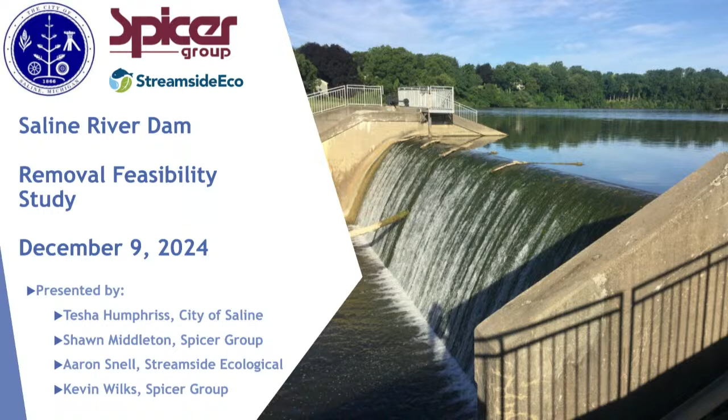At 6 o'clock. Okay, is this on? Is it on? Okay, friends, good. Janet, can I trouble you to shut those doors? Thank you. Should be unlocked.

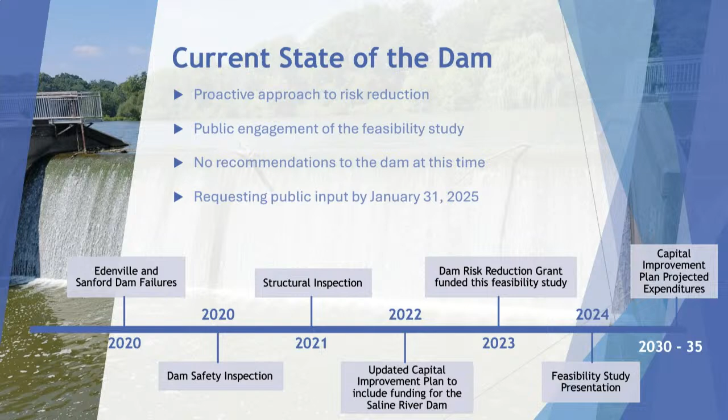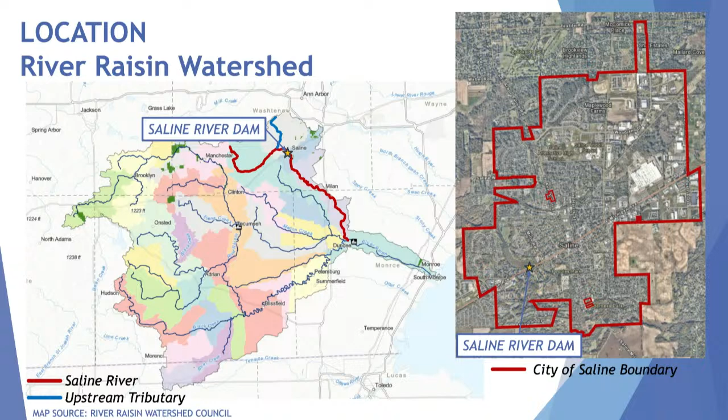I'm going to start out with just a little basic facts on the dam. We are in the River Raisin watershed, in the upstream portion of the River Raisin watershed. This slide shows the current location of the dam in the River Raisin watershed.

The dam was originally built in the 1800s. In the 1930s, Henry Ford rebuilt the dam. It had an earth embankment failure in the late 1960s, so the dam in its current state was rebuilt in 1973 with the radial gates.

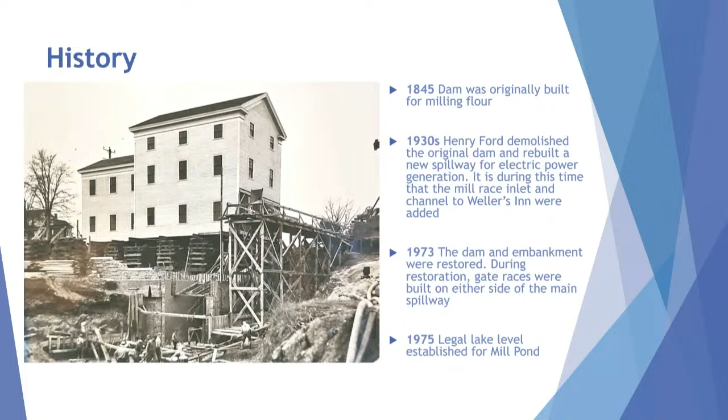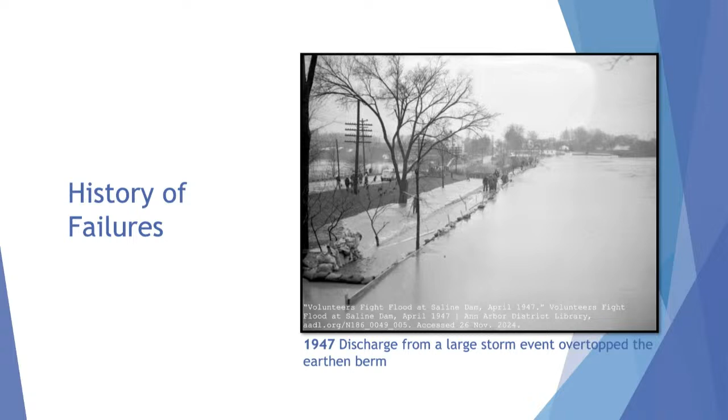So now I'm going to turn it over to Shawn Middleton. Go ahead.

Okay, hold it really close. Okay, how does this sound? Are you hearing me okay? Okay, I'll try and make a point of staying close to it.

My name is Shawn Middleton with Spicer Group. I'm a civil engineer with a background in water resources. I've been working on dams for about 30 years off and on at different levels, both rehabilitation, reconstruction, and removal. So I've been on both sides of this fence and in similar meetings to this in the past. I'm going to hit on a variety of things that will set us up for the rest of the presenters to talk about our feasibility study.

So Tesha just mentioned some dam failures on the Saline Dam. There's been dam failures in Michigan. Currently, on the dam safety website, as a matter of fact, we have some representatives from EGLE here, and there's 41 dams known to have failed. I'm sure it's more than that, but that's probably what's documented. In 1986, there were 14 dams that failed in the center and west side of the state.

The relevance of those is that shortly after that is when the Dam Safety Act became law. That's important because anything we do with the dam has to meet regulatory requirements. So when this large event happened, all 14 of these dams failed, and it was followed up by legislation that resulted in the Dam Safety Act.

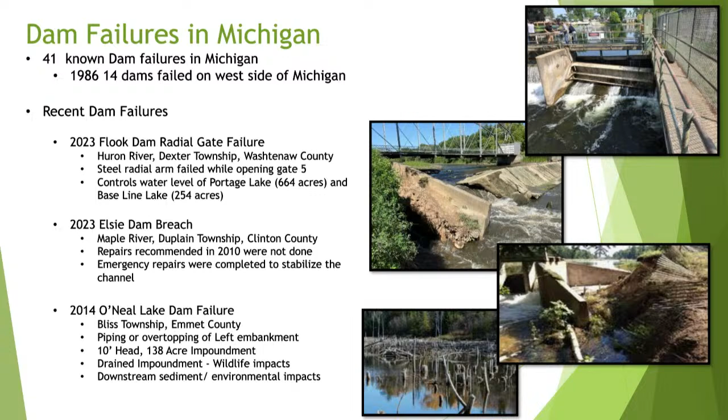On a much bigger scale, everybody's well aware of the dams that failed up in Midland and Gladwin counties with the Four Lakes Dam failure. We're not talking about these because they're similar to your dam - the reason we have these in the slides is really what came about after these dams failed. The state was very proactive in looking at what to do to improve safety and reduce risk, so they created a dam safety task force and produced a report in 2021. There's a lot in that report, and I won't go through all the details, but a couple key things.

Some of the recommendations were based on FEMA's template, or what they do on dams across the country, and a key component of that is the design flood. It's a bit technical, but it's important because it drives a lot of things we'll talk about tonight. Right now, the dam is required by state law to pass the 200-year event. It's considered a significant hazard dam - I'll talk more about that in a second - so it has to pass this event.

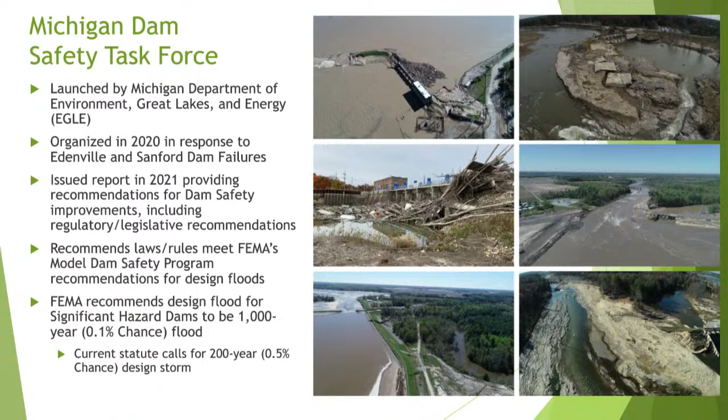Another way of looking at the 200-year event is to call it a 0.5% chance of occurring in any given year. That's probably a better way of looking at it, because you'd have a 200-year event every couple years, but statistically it's 0.5% in any given year. That's right now what the design is. If you go to the FEMA rules, for significant dams it potentially could have to pass what they call a 1,000-year event - that's like 0.1% per year. So it becomes a much higher standard - the bar gets raised, and you'll see later why that's important.

So dam safety in Michigan - as I mentioned, we had regulation established in the late 1980s as a result of those dam failures in '86, and there were some in '85 as well. In 1994, the state of Michigan had all kinds of environmental laws, and they got compiled together into one act called NREPA. That's why the Dam Safety Act is called Part 315 - it's part of that compilation of laws. If you hear the term Part 315, it's talking about the Dam Safety Act.

That basically has a lot of different requirements and rules around it, but some big drivers are dam inspections are required for all regulated dams in the state. Any deficiencies identified need to be addressed. A big thing out of that is owners of dams are liable. The owner of the dam is liable for damage, whether it's economic, environmental, loss of life, the owner's liable for that. So there's a heavy risk put on the owner of a dam.

As I mentioned, it's administered by EGLE. So they oversee, make sure dam inspections are done. They review the inspections. They follow through to make sure the work is done, identified deficiencies are being taken care of.

There's about 2,500 dams in the state, and that's probably a big plus or minus, who knows? There's all kinds of hidden dams in woods and farm fields and everything, but there's 813 that are regulated. In the state of Michigan, a regulated dam is basically taller than 6 feet during a design flood, and it impounds more than 5 acres. If that's the case, then it's regulated. The Saline Dam's a regulated dam.

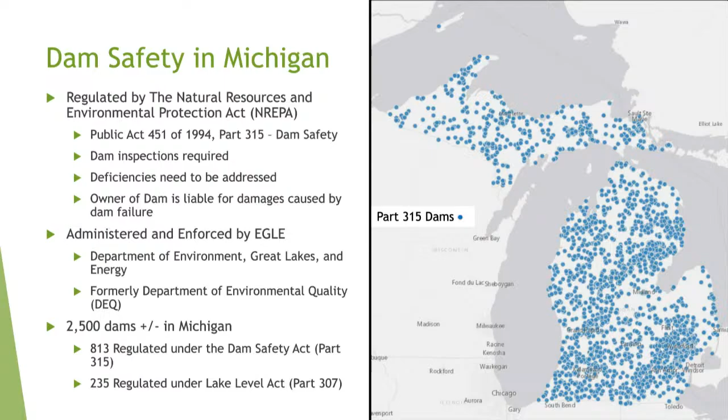There's also 235 Lake Level Act dams, and those are court-ordered levels on a lake. Saline Dam has a court-ordered level, and between those two, those are the ones that require inspections. Under the Dam Safety Act, they're between 3 and 5 years. Inspections are required based on the hazard rating, and then a lake level is every 3 years. And that's what we're under. So you get an inspection on the Saline every 3 years.

I'm going to hit on two things that sometimes get confused together. I'm going to talk about hazard potential classification, and I'm going to talk about the condition assessment of a dam. So hazard potential classification has everything to do with what's downstream and if the dam fails.

So if the dam were to wash out and breach, what that does downstream is how you classify the hazard of a structure. A low hazard dam has basically loss of life is not expected, and really even environmental, economic, or lifeline - which lifeline would be a road that gets washed out that EMS vehicles may need to use - is not expected. A significant hazard dam, still no loss of life is expected, but you start anticipating impacts to whether they're economic, environmental, or lifeline components downstream. And that's what Saline Dam is, and I'll talk a little bit about some of those factors.

Then a high hazard dam, its loss of life is probable. And so when you look at a dam and you simulate it failing, and if there's homes down in the floodplain with very short warnings, you can be in a high hazard dam situation. And we're not here, we're in a significant.

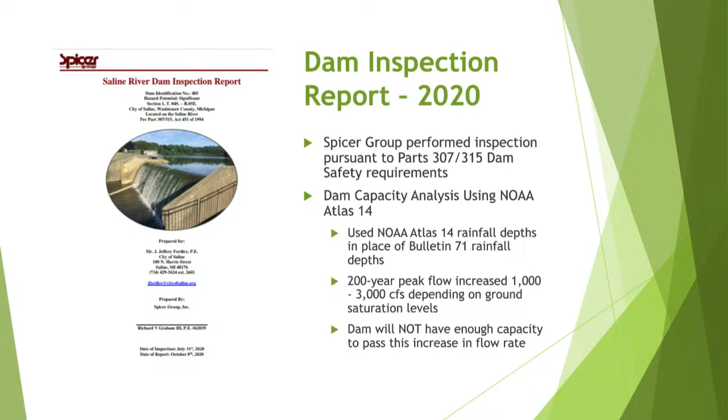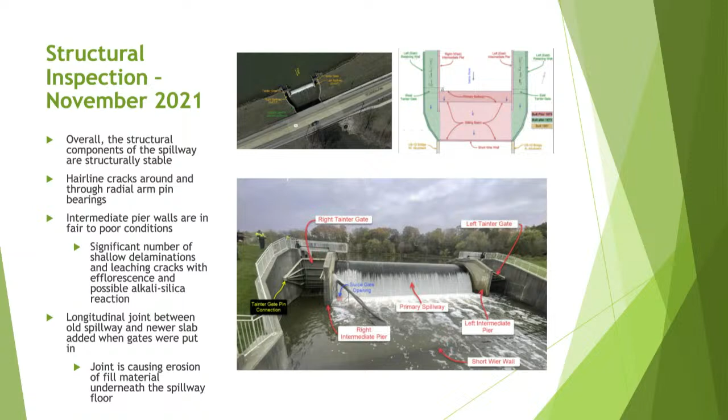We did a structural inspection in 2021, basically shut off flow to the impoundment, allowed us to get in there and walk around. A lot of this is just visual inspections. We're taking a lot of photos up close, looking at cracks, different conditions in the dam. We do what we call sounding, which is basically banging on concrete with a hammer, more or less. When you hit sound concrete, it makes kind of a pinging noise, it's really clear. When you hit delaminated concrete, it's a very hollow noise. You can look at a face of a wall, and it can look fine, but when you sound it, you find out that it's not structurally sound. It can have issues with it.

2023, every 3 years we did another inspection, still had a fair rating. We looked at some recommendations, reconstructing or repairing the intermediate pier walls, I'll show you some pictures of that. Continue to remove brush, it really isn't too much. Continue to monitor depressions in the right embankment, there's been some notes about a little low spot, so we're going to monitor that and watch that. Repair erosion, develop operational procedures for cold weather gate operation, and inspect some scour and undercutting downstream of the stilling basin.

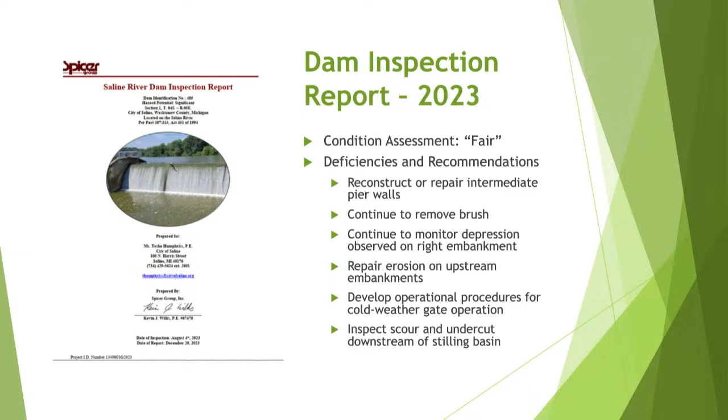So just some quick photos of existing conditions. This is pretty typical of different spots in the dam, but this is what we call spalling - that's concrete spalling off. There's also hairline cracks happening here.

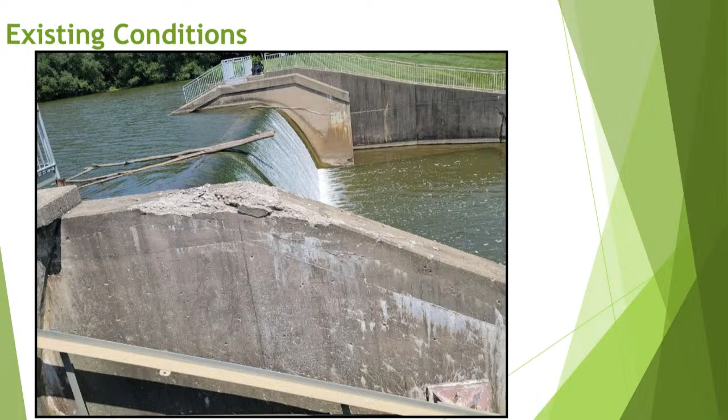We've noticed little differences from 2020 to 2023, not big things that jump out, but there are small changes happening, getting worse.

This area, if you can see the red hatching, that's where we sounded the wall with our hammers, and we had that hollow sound that came back. That area probably has some delamination behind that wall. Even though the wall looks okay, the concrete's starting to get a little punky and needs to be watched.

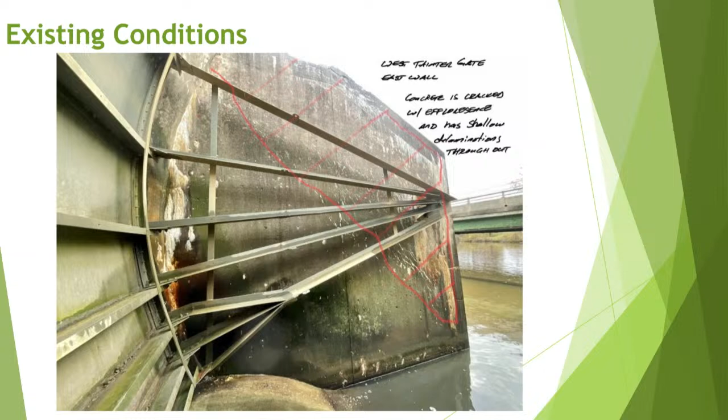This is also a critical component of the dam, because that gate's taking a load of the water. It's transferred to those arms, and those arms are transferred to a pin that all goes into the concrete. So there's a lot of force being applied right there.

Looking at the other side, there's some hairline cracks again, and there's what we refer to as efflorescence - that's the chalky white stuff you're seeing there. That's a result of chlorides being leached out of concrete. Likely here, water's falling on the concrete, leaching into it, and then back out, pulling out those chlorides, and then they dry up on the outside.

Just a close-up picture of one of the pin areas for the Tainter gate. Looks like they might have patched this a few years ago - you can see it in the upper left-hand corner, and there's also some hairline cracks on top of that.

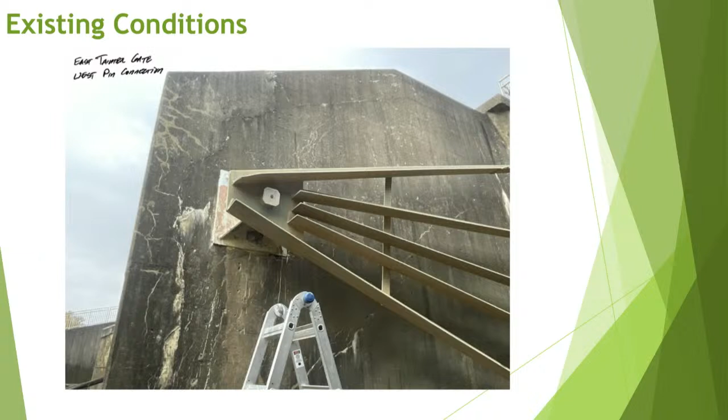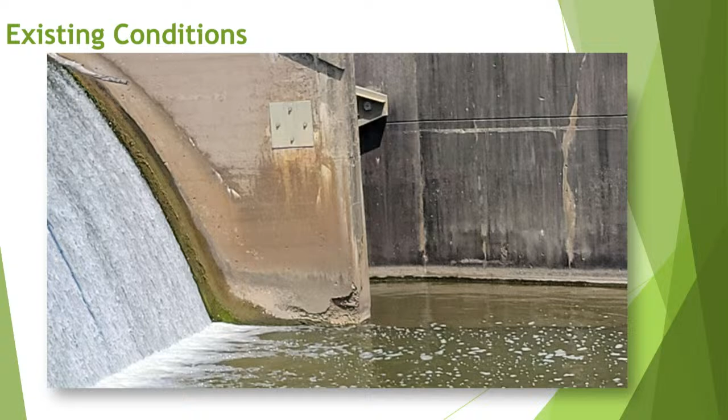I think this is my last photo. One thing to point out here, it's spalling concrete at the water line, but this one actually has rebar exposed. The problem with rebar getting exposed is it immediately starts to rust, and when rebar rusts, it expands, which then pops off more concrete, which gets rusted, and it chases itself out. So these are areas you want to get to relatively fast.

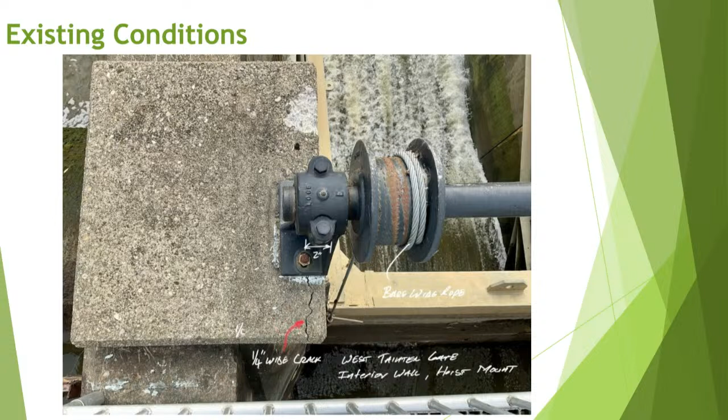This is the support for the Tainter gate lift. We noticed a crack there - obviously a very critical component of the dam, so it's something we want to keep an eye out and look at making some improvements to.

So I'll finish up with this slide before I turn it over to Aaron. The good news is there were only 2 out of 50 applicants that received funding for a feasibility study, and Saline did a nice job of getting this grant. It's funded by EGLE, and as mentioned earlier, it's called the Dam Risk Reduction Grant Program. The key word is risk reduction - EGLE's looking at it as, if you want to reduce risk, you eliminate the risk. If you don't have a dam, you don't have risk. So that's the first thing on the list for funding of construction or studies.

It doesn't mean that's what we're doing, it just means that's their priority. They also fund improvements - more spillway capacity, improving a dam embankment - and that's reducing risk too, but just not quite as much as taking a dam out. So the goals were to look at the feasibility of removing the dam. That's one of the fundamental things we're looking at here - is it possible to do it, and what are the costs?

We've done a lot with that, and I won't get into all the details - some of that may come up when Kevin's talking. We look at permitting requirements, and even though it's a dam removal feasibility study, we have evaluated rehab and reconstruction components too, with costs. The scope is outlined here - we're doing a lot of survey work with the river, environmental assessments, sediment assessments, hydraulics, HEC-RAS modeling, and looked at alternatives and cost estimates.

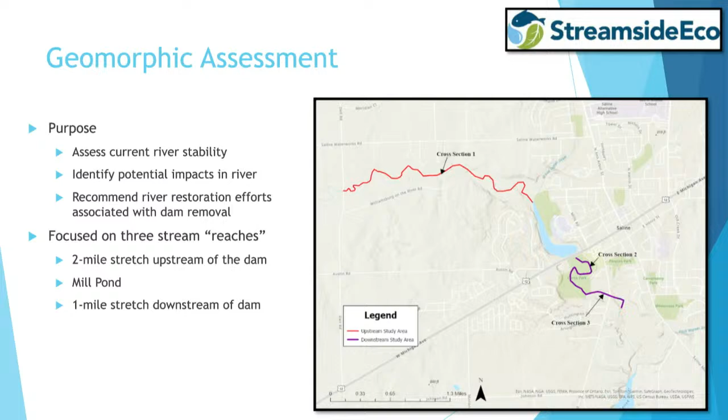This is probably a presentation in itself if you want all the details. But the guidance I tried to provide is: is the existing river stable? And if the dam were to be removed, what might the river look like through the former impoundment?

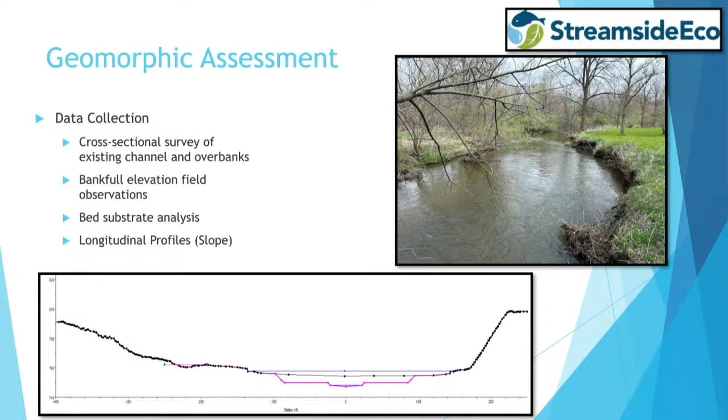The next thing I did was a mussel survey. Freshwater mussels - there's about 42 different species in Michigan. This falls under the permitting category that Sean had mentioned. Mussels have become a really big deal in Michigan over the past 10 years or so. They're a pretty good indicator of environmental health. There's several species that are threatened or endangered for a variety of reasons.

I went out and looked at 5 different sites: one upstream of the dam on the Saline River itself, one on the small tributary that comes into the impoundment from the northeast, one right below the dam, one within the impoundment, and another one down at Monroe Avenue.

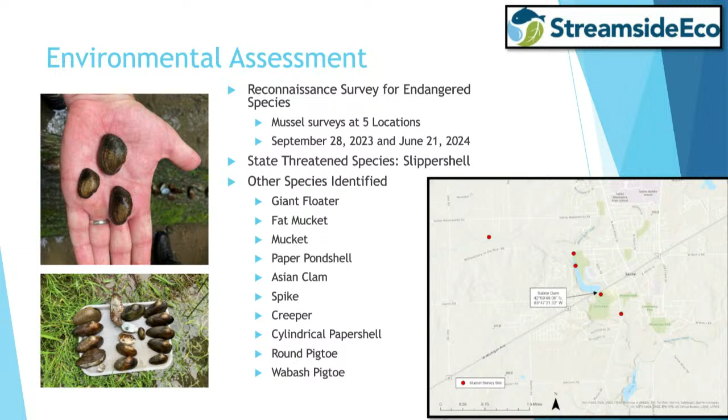You'll notice I only have a few slides. You might be asking why I'm not talking about fish or macroinvertebrates or anything else. This is maybe a bottleneck - maybe that's not the right word - but this is something that permitting is really focused on. If the project moved forward, we'd have to talk about fish and other kinds of critters. But this is just a baseline for the feasibility study, trying to pick out things that could be fairly significant that we'll have to deal with.

I've worked on lots of dam removal projects throughout the state. I think these are a few benefits of dam removal that I thought I'd mention. These are true benefits that you see in just about every dam removal project.

Restored free passage for fish and other aquatic animals. In its current state, if you're a fish that needs to get up the river to spawn and you hit a dam, that's the end of the road in most cases. You can't make it any further up into the headwaters. Interestingly, a lot of the mussels you find depend on a fish host in their life history. These mussels will attach their egg to a fish, and the fish will swim upstream as far as it can go, and then the egg falls off and develops into a mussel. So a lot of these critters that live in the stream have interrelated life histories. If the fish can't make it any further, neither can the mussel.

Removal of a dam typically improves water quality. The Saline River at one time would have been free-flowing before the dam was put in place. Now that the dam is there, the impoundment basically serves as a sink for pollutants. Any water coming off the farmland or forest land in the upper watershed mostly settles out in the impoundment. That's why you see the impoundment start to fill in over time. It's the sediment, and the sediment carries nutrients and other pollutants which attach themselves to it and settle out.

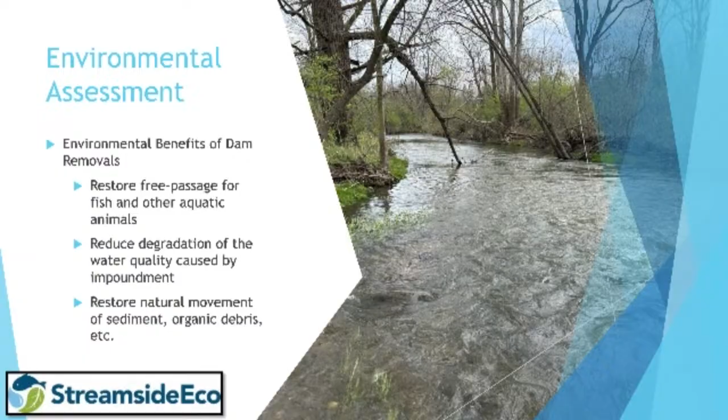As Aaron mentioned, the first slide I'm going to talk about is the impoundment and sedimentation. As part of the feasibility study, we did a survey of the impoundment, surveying both the top of sediment and the sediment depths. This allowed us to estimate the quantity of sediment that has filled into the impoundment over time. We found that approximately 30% of the impoundment is actually filled with sediment that has accumulated, which would have otherwise gone downstream. To put that into perspective, that's about 23 Olympic swimming pools worth of sediment.

Okay. Can you hear me now? Okay.

EGLE has some guidance about sediment sampling, testing, and analysis for dredging projects. If the Saline River Dam were to be removed, we would have to do something with all of the sediment that would come with it.

If the Saline River Dam is removed, we have to manage the sediment in some way. Part of what guides how we manage it is whether or not the sediment is contaminated with any toxins or heavy metals. So we followed the EGLE guidance to sample and test the sediment, submitted it to a testing facility, and they tested for everything EGLE requires. What we found is that it was below the allowable limits for all of the things tested. I won't go through every one of them, but basically the tests came out good.

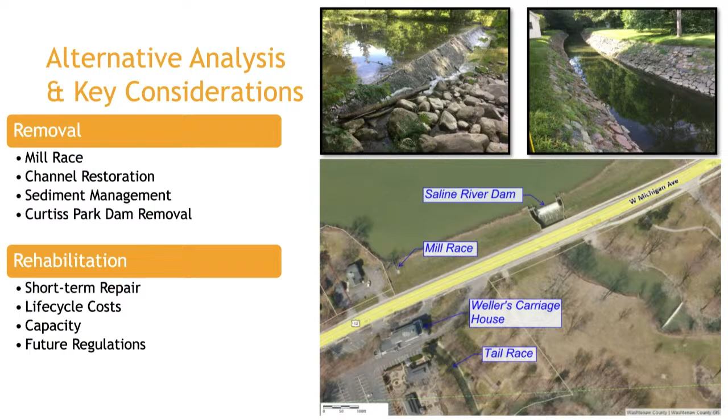So I'm going to show some artist renderings of what the Saline River Dam could look like post-removal. These are obviously very preliminary in nature. There's not a particular exact look of what it might be that would come through final design, but these are good samples of what it may look like.

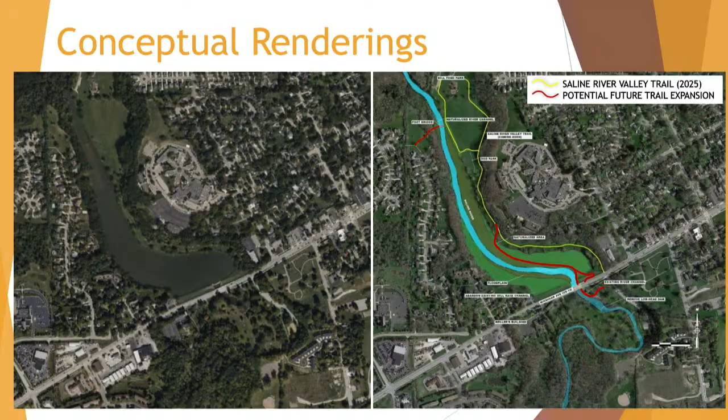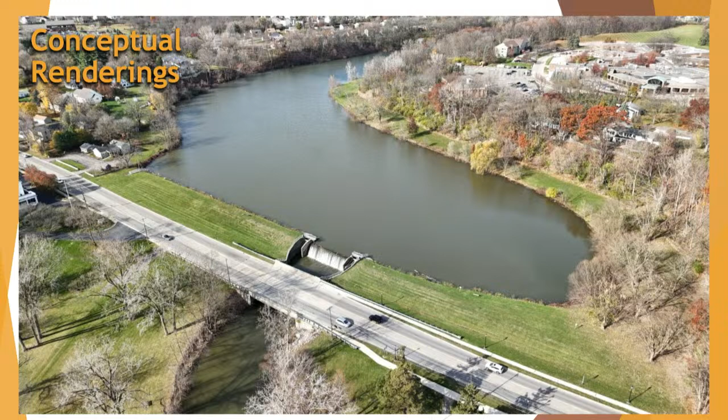This slide, I think, does a good job of demonstrating the scale of how much larger the park would potentially get with the dam removal project.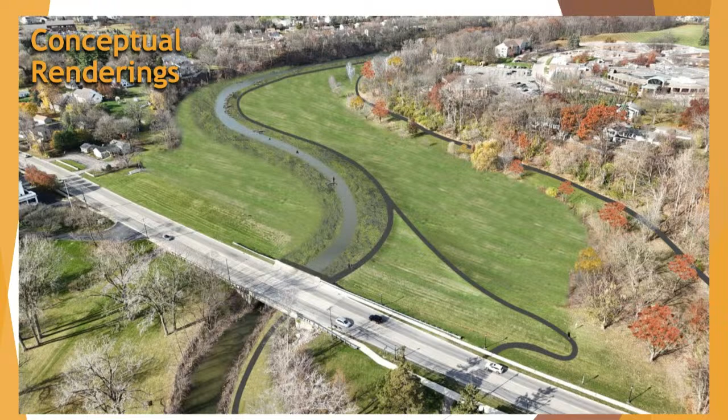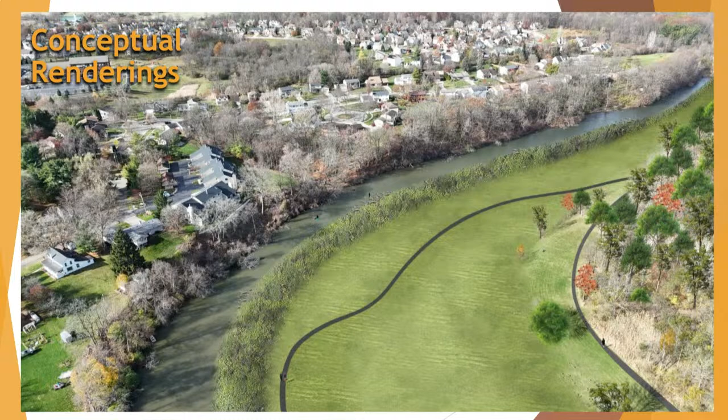And then again, this is a little bit farther upstream, still facing northwest. This demonstrates the scale of how much smaller the water surface would get and how much larger the park could get.

These are just some samples, aesthetic features that could be applied post-dam removal. The lower left is actually in the village of Dundee, right downtown, where there's a little trail that goes under M50. And in the upper right is a sample of a park in Ohio with what they call a naturescape, a play feature with a semi-natural look.

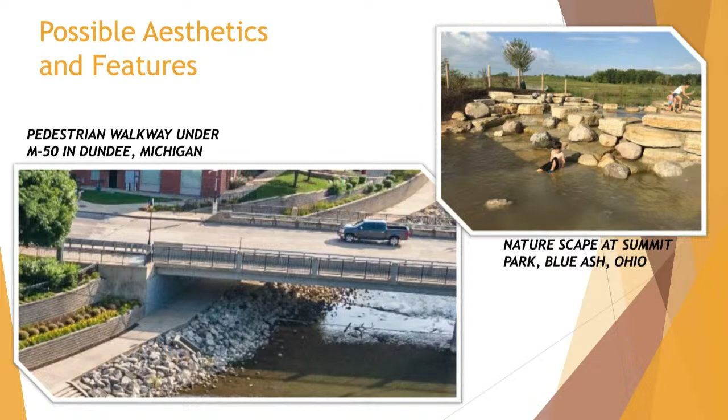To the point I made earlier, if we were to remove the dam, it wouldn't just be ripping the dam out and letting the river do its thing and potentially have a mess.

This is the Brown Bridge dam removal. It took place, I believe, in 2011. That first picture on the left, all of these pictures are taken from the same vantage point of the same area, but that first one was very shortly after the dam removal, so you can see it's a little messy but somewhat restored. Then just 2 years later, by 2013, they established a meandering channel through that field.

All of what you see as a field right now was all impoundment, completely underwater, held back by the dam. So in 2 years they had that channel stabilized, and fast forward 10, 11 years to February 2024, you can see that channel hasn't changed. That just demonstrates how quickly we can restore a channel and get it stabilized.

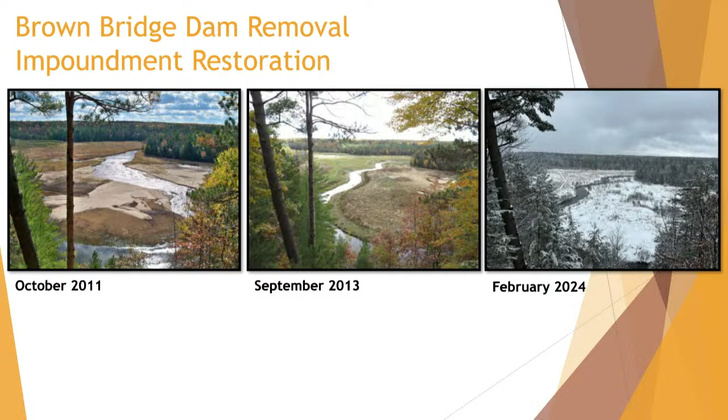So I'm going to talk a little bit about the alternative analysis, and this table on this slide and the next one is the same as the handout sheet. If you want one and didn't get one, I think they were stacked at the table in the back, so you can take that home with you. I'm going to highlight a few of these things.

This is comparing removing the dam versus rehabilitating it. Naturally, if we're to remove the dam, that's a pretty big cost up front. We're estimating about $4 to $6 million, with some variability depending on which specific alternative for removal is used.

The benefit of that, though, is almost no costs related to this dam into the future. The only real cost is ongoing operation and maintenance. As you saw in the renderings, you'd have a much larger lawn for Mill Pond Park that has to be mowed. The city estimated that at about $3,000 per year for lawn mowing, just to add that extra space.

For rehabilitating the dam, back to Sean's slides, there are some structural repairs that are necessary and those would have to come fairly quickly. We're estimating that around $1 to $1.5 million. The drawback is that at some point the dam will have to be either completely overhauled or possibly replaced entirely, whether due to further deterioration or updated regulations. If we need to add capacity to the dam, that might cause a complete replacement, and we estimate that around $6 to $8 million.

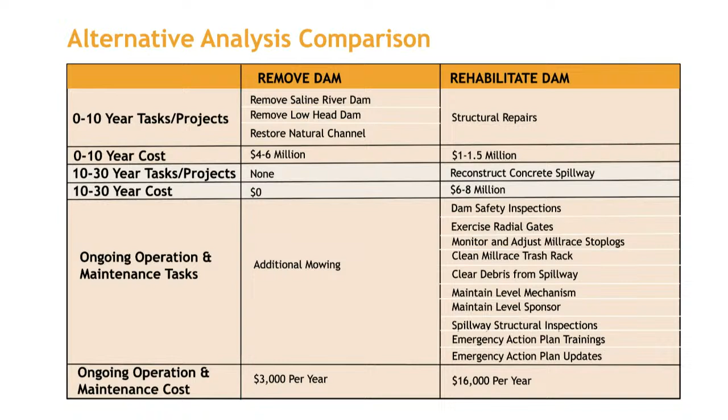So for benefits and drawbacks, we brainstormed this and I'd be very interested, as the mayor said, there's opportunity for public participation and comments. We're very interested to hear any other benefits or drawbacks anyone has to offer. But the big ones for us are the removal of the liability and hazard of just having a dam, and also the long-term costs of having a dam. As I mentioned, there's of course the cost of the improvements that are necessary.

At some future date unknown, it'll likely have to be replaced, and then obviously there's the ongoing maintenance and operational costs. But of course, the benefits of keeping it - many of you are very passionate about keeping the dam, the history of the dam, the aesthetics of the dam - that's very important to consider as well.

And then drawbacks - I kind of already touched on the cost of keeping the dam is high, the hazard and liability can be high. But of course, removing the dam, if you love Mill Pond and love seeing it every day, that's definitely a drawback.

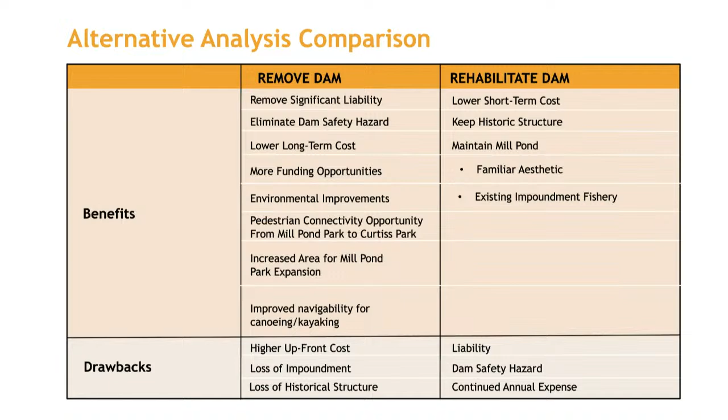So I'll kind of start to conclude here. Like I said, we're very interested in any input or questions anybody has. There will be an opportunity tonight for anybody who wants to speak, and then our email addresses are there. You can email me, Kevin Wilkes - my email is on there - or Tesha Humphris, or both. Like the mayor said, these slides will be available on the city website, so you'll be able to find the email addresses that way also.

Moving forward, we'll be evaluating all of the input that we received from you and doing our best to include it in the report. I'll just caveat that with some things might be a little bit out of the scope for just an initial feasibility study. Definitely there's a lot of things to consider. Some of them might just be more for final design, but we are very interested in hearing anything anybody has to offer. And then we will conclude with finalizing a report.

So I think that concludes our presentation, and I believe Mayor Marl is going to moderate questions.

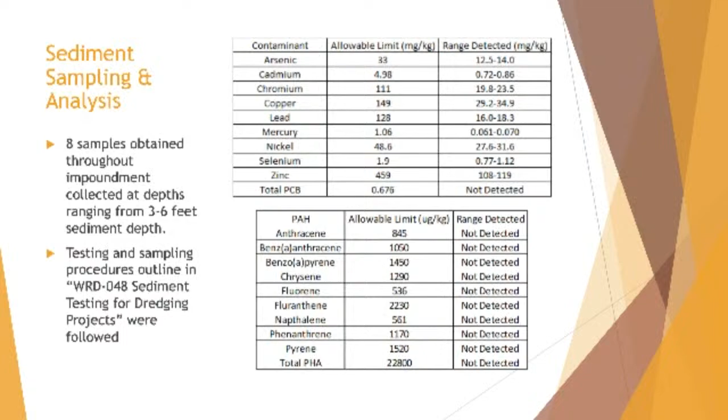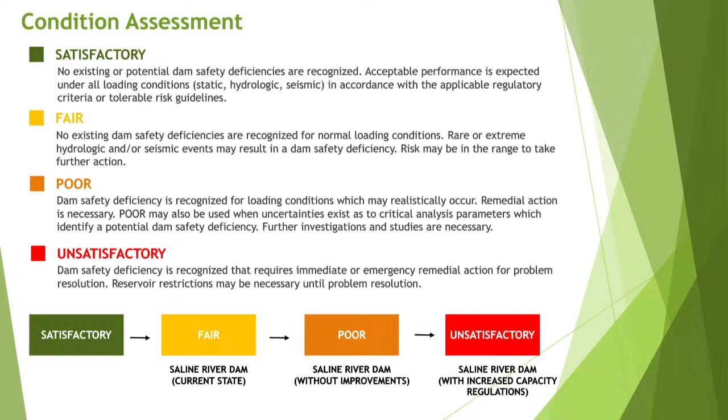Get that question? Yes, yeah, we did. We're going to pull up the slide on the dam breach, but if the dam were to fail, most likely, depending on the rate of failure, some dams fail quickly, some take time to fail. If it was a very quick failure, you're going to have a breach wave that would go downstream and could affect bridges potentially. If anybody's in its path, they could be harmed.

Then after that, the sediment's going to release if it's low enough. If the dam breach is low enough, then all the sediment we're talking about will start to migrate downstream, in essence uncontrolled. That's just going to work its way down, and it's going to start settling at different places. It's going to push the river around, and there's impacts biologically. I'm going to turn it over to Aaron, but that would be probably the two main impacts: a wall of water and then sediment migration.

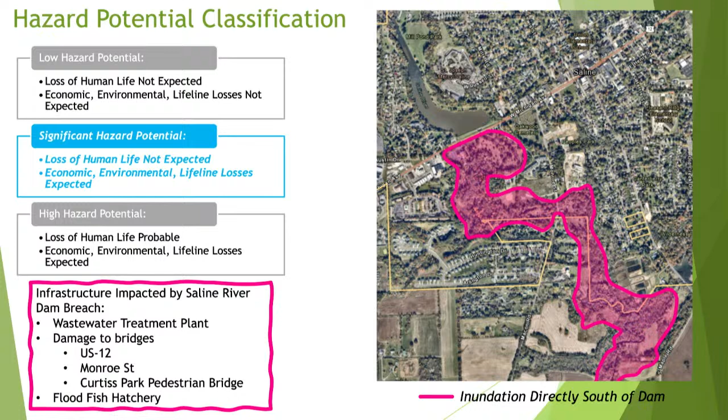I think, rather than a specific biological discussion, we can allude to what Sean mentioned earlier, that the owner of the dam is actually liable for that failure. I've seen fines in excess of, well this was for Edenville, just $80 million for just mussels, damage to the mussel community. So it's not only going to wash out bridges, sediment the river, but depending on the impacts to the biological communities, there can be pretty significant fines.

Very good. Ben, we're going to end the questions from those participating remotely, but we do have a few remaining in the audience here.

I just want to make a comment with regard to some of the fears that I'm hearing expressed by the community of what it's going to look like after the dam's removed. And you had a really nice sketch up. I just wonder how similar to what you've designed here or predict it could look like, how similar it could look like to Dexter's River Walk, which is absolutely beautiful. That would add value to those who are living next to the dam area right now—yeah, sure, you're overlooking water, but if you're overlooking something that looks beautiful like a parkway like Dexter's, I think that would add equal value.

So if you could speak to that, I'd appreciate it.

I've actually worked in the city of Dexter on the river there, doing some work post-dam removal, specifically fish habitat improvement. There's probably a lot of examples by now, though I don't know how readily available they are to see online. Certainly visit communities that have removed dams—there's a growing list of them. I've been involved with Freeport Dam, Lake Kathleen, and a lot of rural ones.